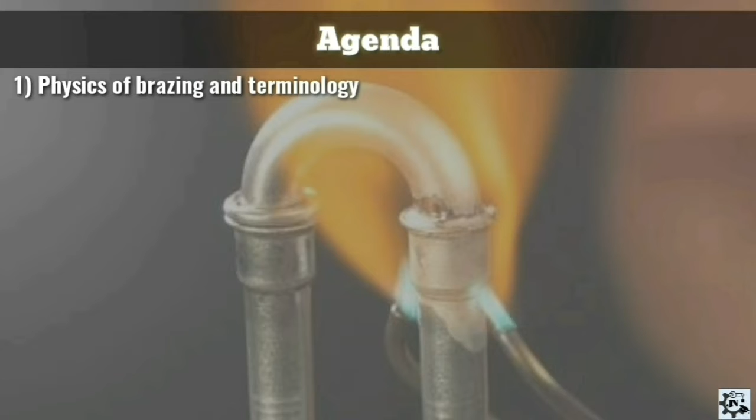First is physics of brazing and its terminology, then brazing rod and its specification, brazing flame, pre-cleaning process, post-cleaning process, what is flux, then what is nitrogen purging, what is the heating sequence for the brazing operation, then brazing clearance, and the last is brazing quality.

So let's start with the first content, that is physics of brazing and terminology. What is brazing? Brazing is a metal joining process in which two or more metal items are joined together by melting and flowing a filler metal into the joint. The filler metal has a lower melting point than the adjoining metal.

In the brazing process, the temperature of the assembly to be brazed is raised to the point at which the brazing filler metal becomes molten and fills the joint clearance between the base material. Let's have a look at this drawing. Here we see the two parts are joined together with the help of the brazing material, or we can say

the filler metal. Here what is actually done, these two metals are heated up to the temperature that is the melting point of the filler metal. So these two parts are joined together with the help of filler metal.

What are the things we need during the brazing operation? First thing is the brazing torch, then the filler metal, that is also called the brazing rod, then the base material, the material to be brazed. These base material and material to be brazed are the two parts which are to be joined by means of the brazing operation. Then flux, then nitrogen purging.

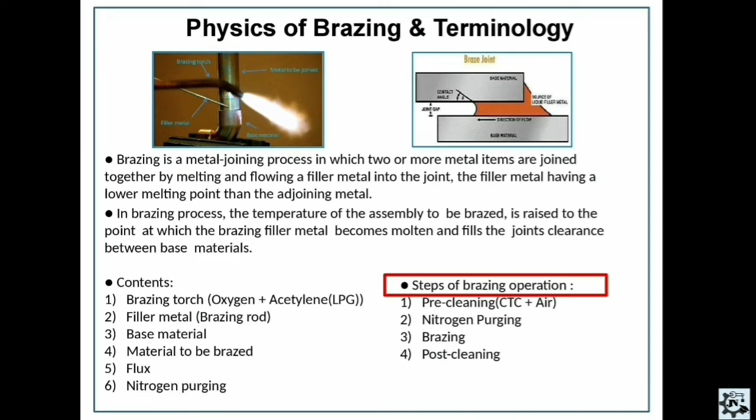And what are the basic steps that need to be followed during the brazing operation? First is the pre-cleaning, then nitrogen purging, third is brazing, and fourth is post-cleaning.

So let's understand what is brazing rod and its specification. Brazing rod is the material which is used for joining the two parts during brazing operation. It's a filler metal which is to be filled between the joints of the two parts.

There are a number of brazing rods which are used in the industry as per their application, but we will focus on the most common 5 types of brazing rods. First is Harris zero, then second is Dynaflow, then 35% rod, blockade, and the low fluming rod. Here you can see the chemical composition for each type of rod in this table.

Let's have an example of Harris zero. There is 0% silver, 7.1% phosphorus, then 92.9% copper, 0% zinc, 0% tin, and 0% other components. So we can say in Harris zero type of brazing rod there are only two contents present, that is phosphorus and copper.

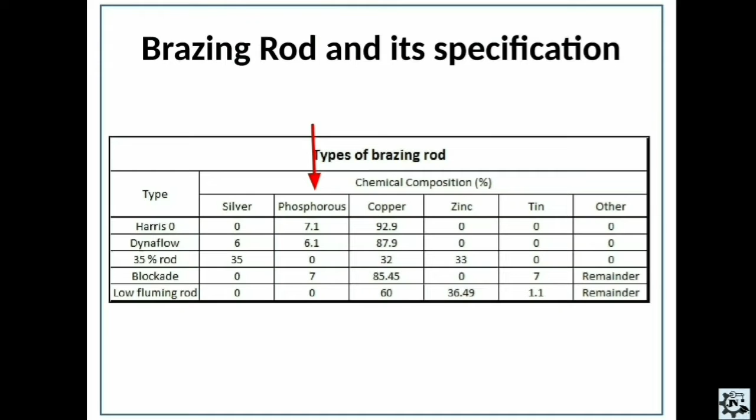In all these chemical compositions, each component plays a major role during the brazing operation. Take the example of silver. Silver plays the role of fluidity. That means the more the silver content, the more the fluidity of the brazing material. Then take the example of phosphorus. Phosphorus itself acts as a flux during brazing operation.

Now what is brazing flame? Brazing flame is the flame which is produced in the brazing torch and used for heating the metal components during brazing operation. There are basically 3 types of brazing flame. First is carburizing flame, second is neutral flame, and third is oxidizing flame, and they are characterized based on their oxygen and acetylene content.

We can say acetylene or any gas we use for brazing operation. In carburizing flame, oxygen percentage is less than the acetylene percentage. In neutral flame, oxygen and acetylene percentage are the same, that means we can say 50-50%. And in oxidizing flame, oxygen percentage is greater than the acetylene percentage.

Also, the difference between these three flames can be easily visualized. You can see in the drawing. In the carburizing flame, there are three different layers. First is the white inner core with a slight blue tinge, then there is the acetylene feathery edge, and the last is the outer layer, which is extremely light green.

In neutral flame there are two layers. First is the white inner core with slightly blue tinge, and the outer layer blue with white tinge. And in oxidizing flame also there are two layers, but there is one difference. We can see the inner layer is the brilliant white inner core, not a blue tinge, and the outer layer is the same, that is blue with white tinge.

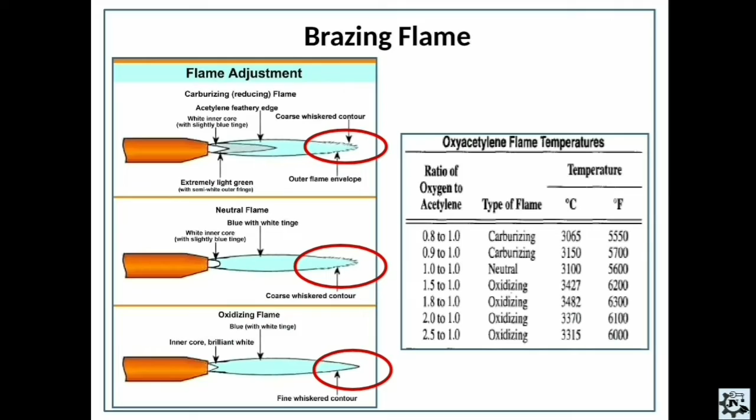Before starting any brazing operation, we need to follow the pre-cleaning process. Pre-cleaning means cleaning the surface at which the two parts are to be joined together. That means before starting the brazing operation, we need to ensure that the surface where the two parts are joined is properly clean and properly smooth also.

Also, in the pre-cleaning process we need to remove all the surface contaminants, any kind of burrs, any kind of dust present on the surface. For that we can use pressurized air also.

Now the second is chemical cleaning. In chemical cleaning we use different kinds of chemicals or solutions for the cleaning process. These chemicals either react with the oils, dissolve the oils, or lift the oil from the surfaces. The most commonly used chemical for chemical pre-cleaning is CTC, that is carbon tetrachloride, which is most of the time used in the industry as a pre-cleaning process.

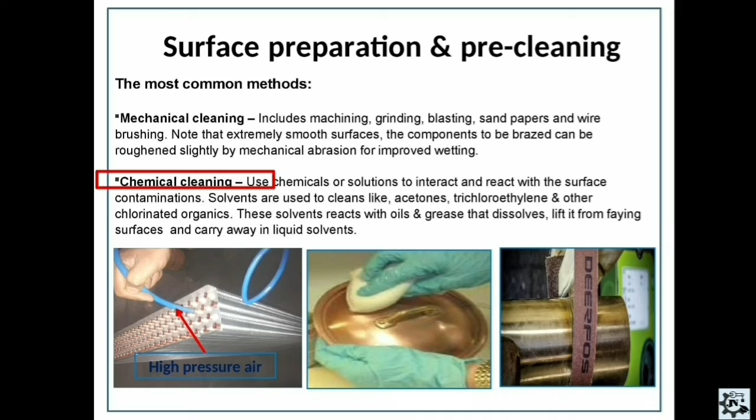Now the next step is the post cleaning process, or post braze cleaning process. Post cleaning is the process in which the metal components and the brazing joint are cleaned right after the brazing operation. There are basically four types of post cleaning process: first is soaking or wetting, then quenching, then chemical cleaning, and then mechanical cleaning.

First is soaking or wetting. Here we use hot water with agitation in the soak tank to remove the excess flux immediately following the brazing operation, and then dry the assembly. So with the help of this hot water we remove the excess flux or residual flux from the brazing joint or the metal components.

Second is the quenching process. In this process, the metal component with the brazing joint is immersed in water immediately after the brazing operation, which induces thermal shock on the residual flux, so that the flux can be easily removed.

The main thing we need to take care of during the quenching operation is that this process should not have any adverse effect on the brazing joint, because such thermal shock during the quenching process may have an adverse effect on the brazing joint also. It may create cracks in the brazing joint. So as per the application and requirement, we need to follow this quenching process.

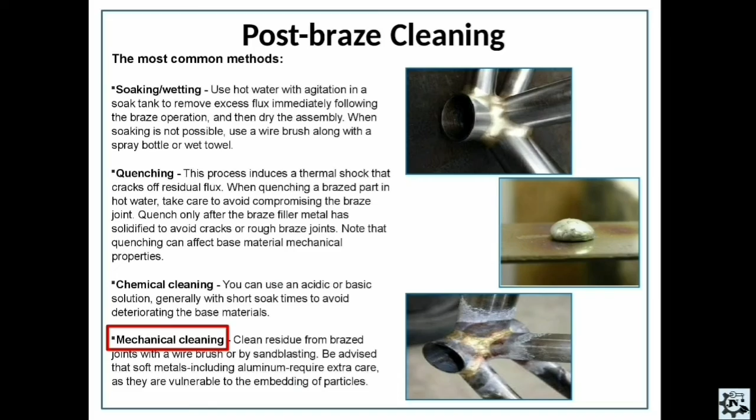Now, what is nitrogen purging? Nitrogen purging is the most important process to be followed during the brazing operation to avoid oxide formation during brazing. Take one example. Let's consider we are joining two copper tubes by means of the brazing process without the nitrogen purging operation.

During the brazing process, the oxygen in the air combines with the copper to form copper oxide. That means oxide forms on the copper surface. So during braze heating, oxide scale forms inside the copper tube, and this dark scale flakes off and is carried along to clog small orifices. For preventing such issues, we need to follow the nitrogen purging process during the brazing operation.

Now what is the procedure for the nitrogen purging process? Nitrogen is passed through the tube during brazing to prevent internal scale formation. But one thing we need to take care of is to use a low flow rate of nitrogen during purging, because if we use a high flow rate, the excess pressure inside the tube restricts the flow of brazing material during the brazing operation, so it may have an adverse effect on our brazing quality. So this is one thing we need to take care of.

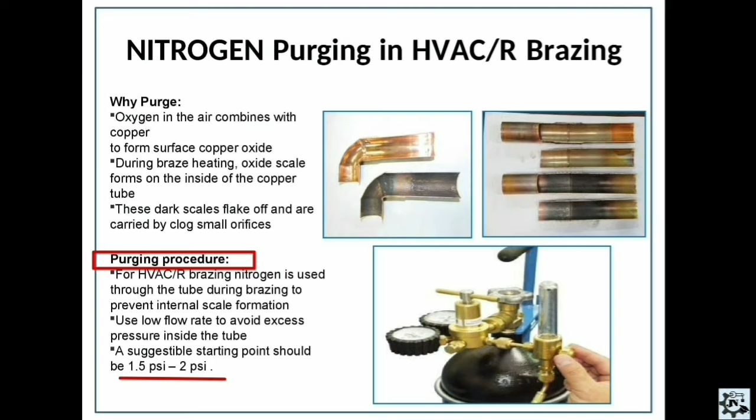The suggested pressure of nitrogen used during the nitrogen purging process is 1.5 psi to 2 psi, for preventing excess pressure issues during the brazing operation.

What is flux? The purpose of flux is to remove the oxides from the base material and to prevent oxidation during the heating process, thus promoting the free flow of brazing filler metal. The liquid flux is a chemical agent that serves several purposes: it cleans the metal surface, creates a barrier that prevents oxidation, and allows the filler material to flow more freely over the work area.

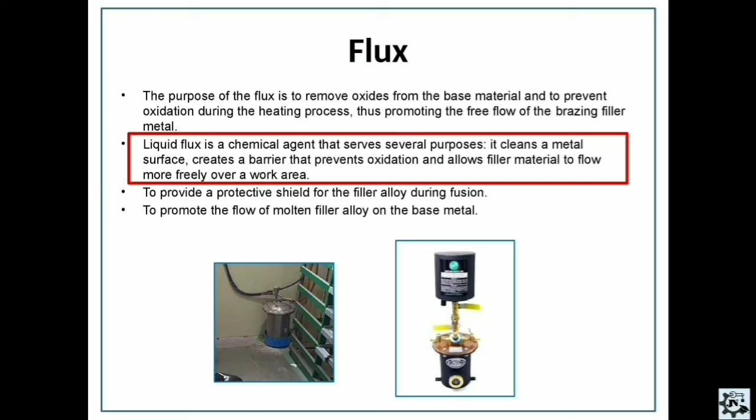Most people say that flux helps in cleaning the surfaces. Actually, the reason people say it helps in cleaning the surfaces is that it doesn't directly clean the surface; it creates a barrier against oxidation. That's why it prevents oxidation, so the surface of the metal remains clean. That's why people in industry say it helps in cleaning.

Also, flux is used to promote the flow of molten filler alloy on the base metal. That means it helps in the wetting process. As I said earlier, wetting means the proper flow of brazing material during the brazing operation. We can say it promotes the fluidity of brazing material.

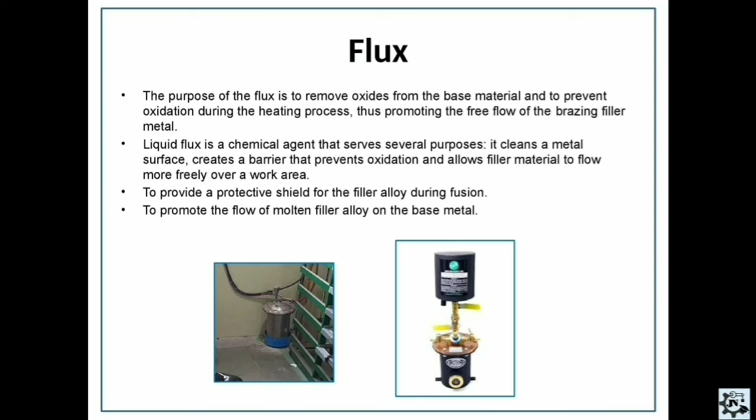There is one more function we need to understand about flux. Flux can be used as a temperature indicator. Specifically, when we use powder flux for brazing, we need to understand at what temperature or at what time we should feed the brazing rod at the joint of the two metals. In such cases, powder flux acts as a temperature indicator because when it starts melting, it indicates that this is the time to feed the brazing rod at the joint of the two metals. So flux can be used as a temperature indicator during brazing operation.

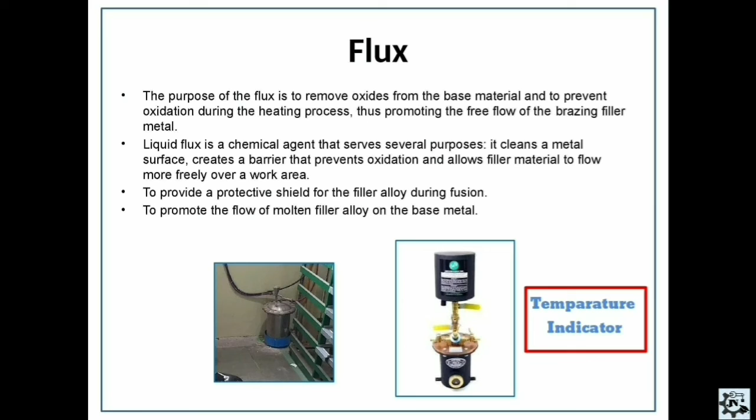Brazing clearance is a mandatory concept we need to understand before starting the brazing process or joining the two parts. As we know, the brazing process works on capillary action, and if the clearance between the two parts is less or more than required, it directly affects the capillary action and results in improper brazing quality.

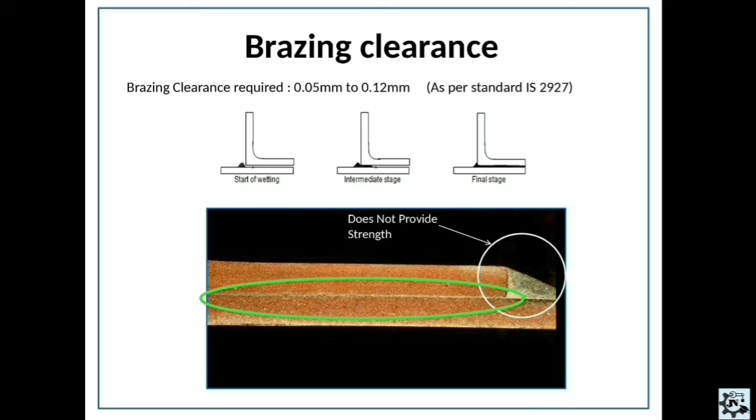Because proper penetration of brazing material provides the strength to the brazing joint. You can see in this drawing, this is the area where the actual strength is provided to the brazing joint, and in this area proper strength is not provided. Here the maximum area comes in contact with the brazing joint and diffusion occurs, but here less area comes in contact. That's why it provides less strength, and this area provides the maximum strength to the brazing joint.

Let's take one example for brazing clearance. Consider we are joining two copper tubes by brazing. As per the application and as per the standard IS 2927, the brazing clearance required is 0.05 mm to 0.12 mm. This is the radial clearance. If we consider the diametrical clearance, it becomes double, that means 0.1 to 0.24 mm.

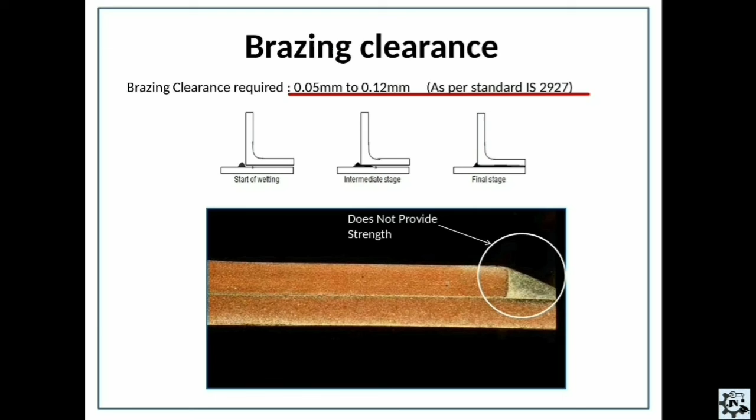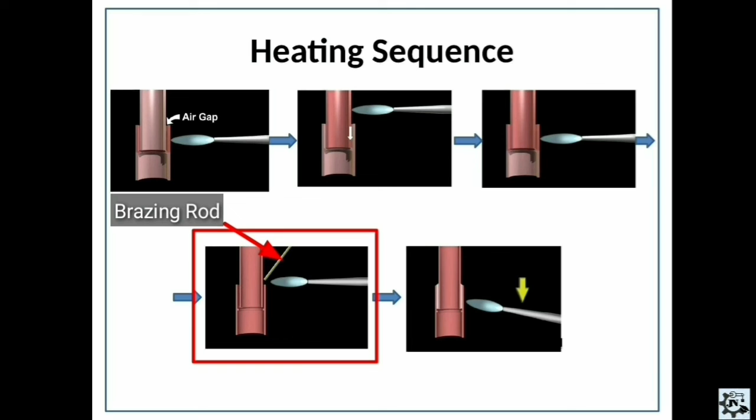Let's understand what heating sequence we need to follow during brazing. Let's take one example: we are joining two copper tubes. This is the base metal and this is the metal to be brazed. This drawing indicates the first step of the heating sequence. Here we need to apply the brazing torch to the base metal. That means we heat the base metal first, then heat the metal to be brazed, then again heat the base metal, then feed the brazing rod, and then again heat the base metal. This is the standard heating sequence we need to follow during brazing.

Now the question is, why this sequence? Because initially, as shown in this drawing, we need to heat the base metal. Why? As we know, if we heat any metal, it starts expanding. So if we heat the base metal, it expands and creates an air gap between the two metals at the joint, which helps the capillary action of the brazing material. At the end of heating, please ensure proper penetration of brazing material every time.

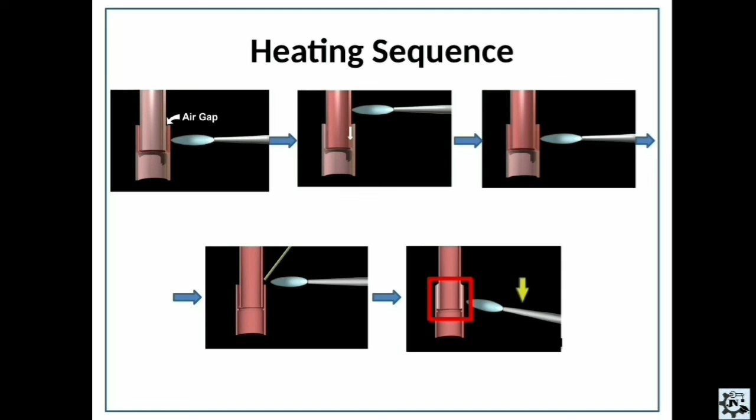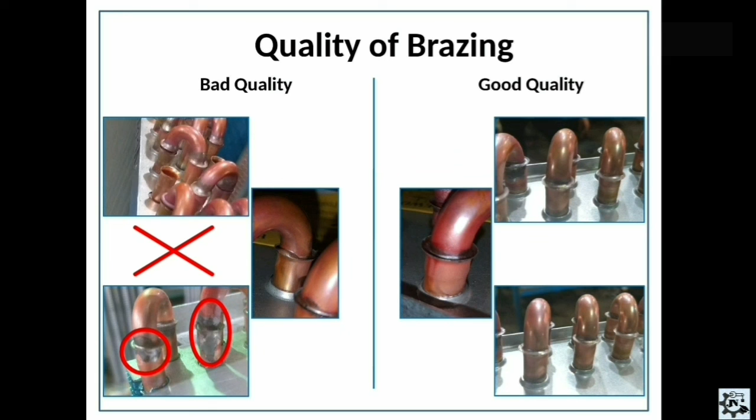So this is all about the brazing operation. Hopefully this will be helpful for all the students and industry people who work with brazing on a daily basis.